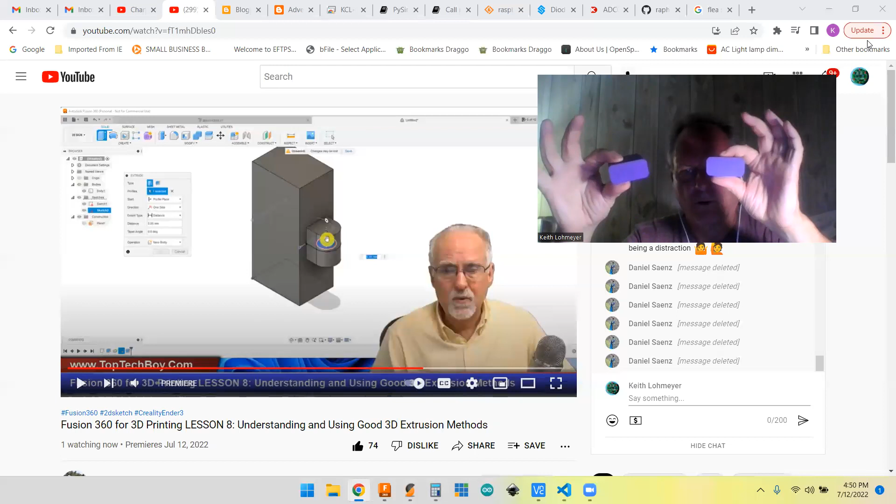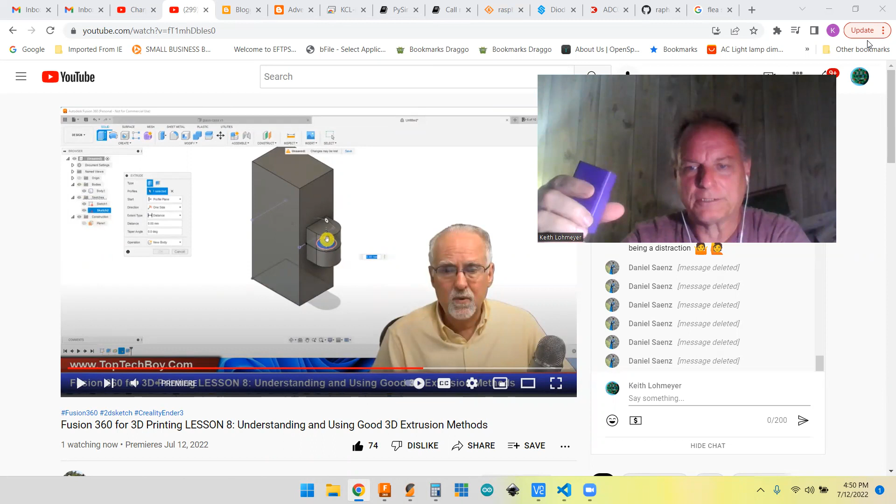So here's the two pieces. Like I say, I work in inches, so I got a 2-inch top and a 3-inch bottom, and it's about 1 inch by 2 inches in that direction, and they slide together. You can see the line where they slide in, and then inside here you can see this line just a little bit in there.

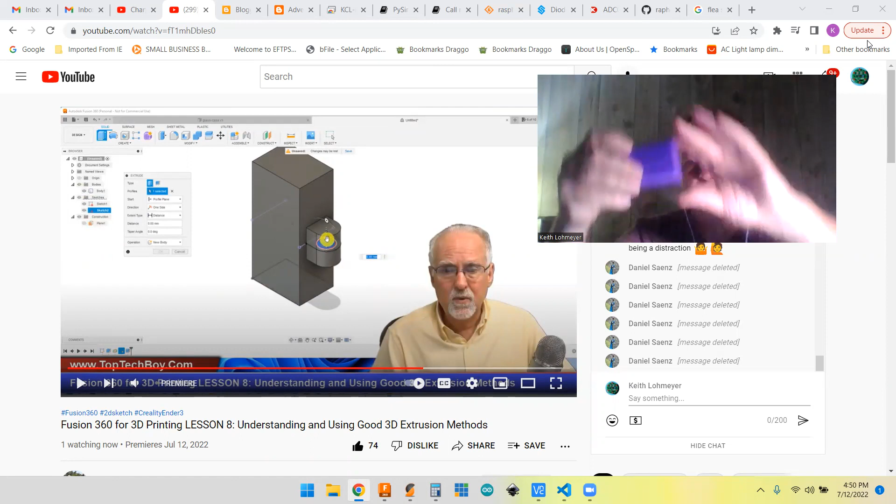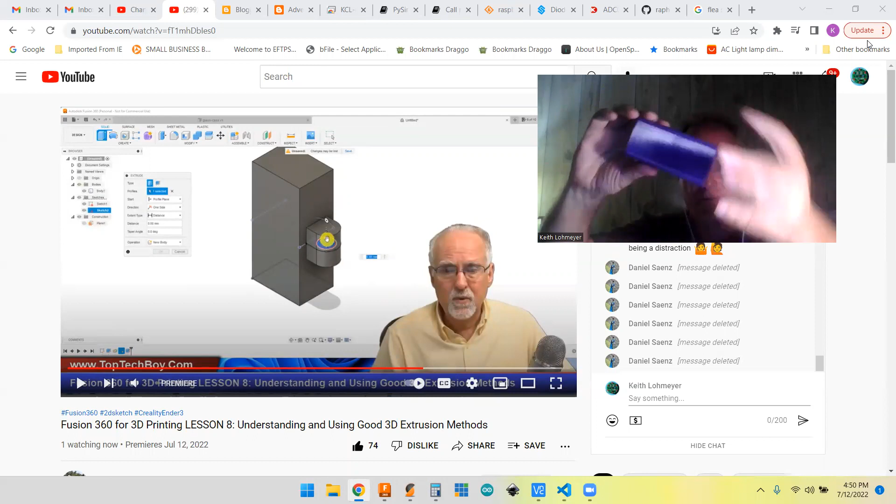So they slide together. I chose to have a 10 thousandths clearance. I knew that would give clearance on my 3D printer, but after I did it, I said well, I probably should have made it a little tighter so that they don't fall apart without help pulling it apart. So like I said, I used a 10 thousandths clearance on that one.

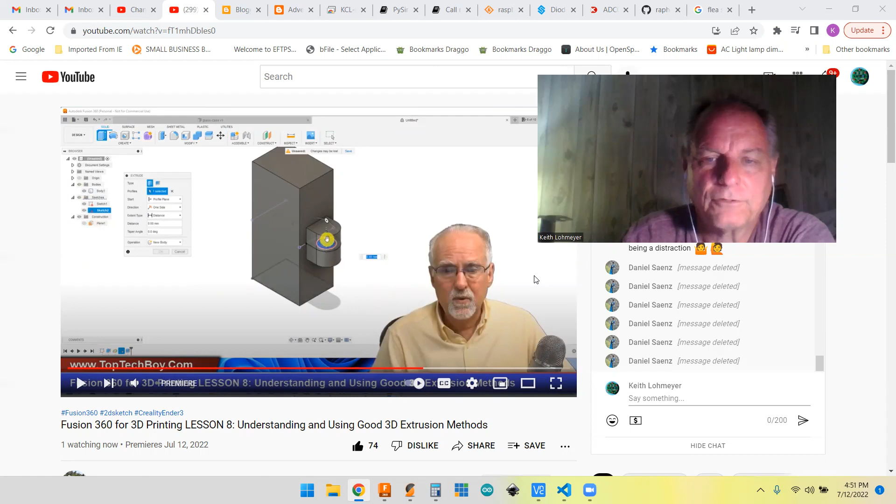I think I'm going to redraw it for you guys and do it with only 8 thousandths clearance, which I think equates to about 0.2 millimeters for those doing metric clearance. So let's go ahead and get to Fusion 360, make myself smaller and move it over.

Choose Fusion 360. If you've watched my past videos, you know that I like to work with components and try to have it assembled in place. So that's what I'm going to do for this project. Probably a little different than how Paul's going to show you, but I like this workflow and it works for me, so hopefully people see a different way of doing things.

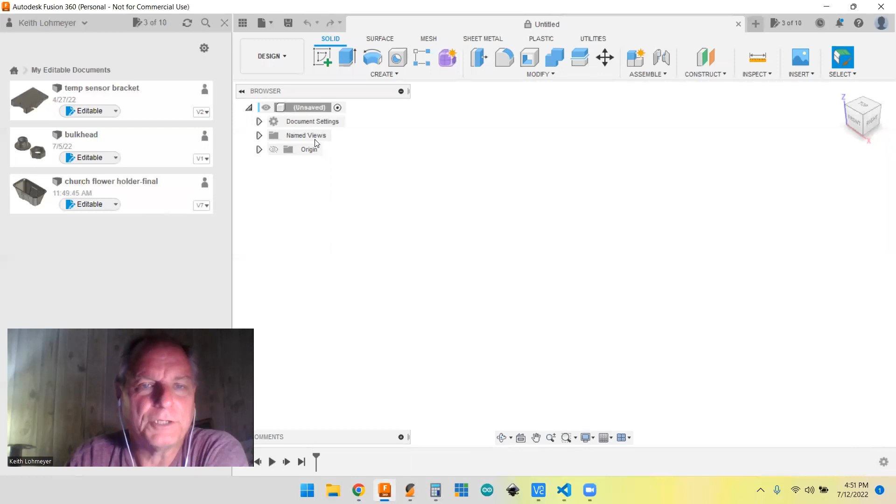We'll start with a sketch. We're on the XY plane. I like a center rectangle, so we're going to do a center rectangle, start in the center and pull it out. Like I said, it's going to be 2 inches by 1 inch. And enter.

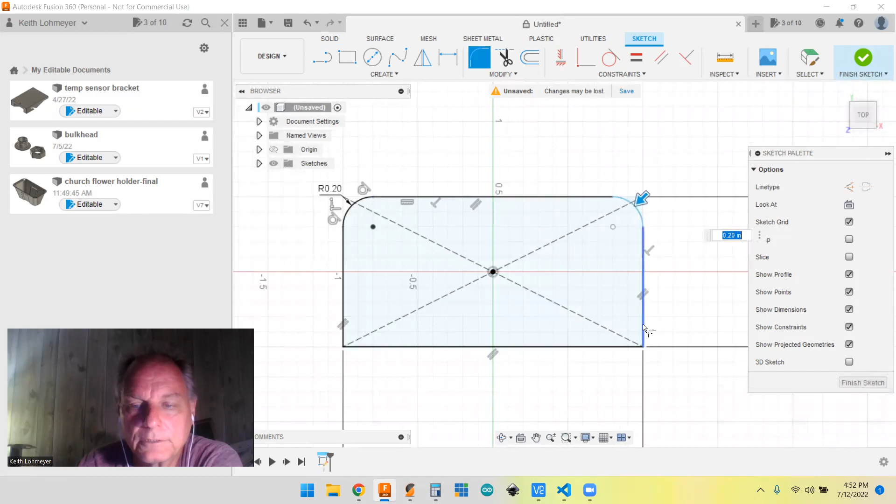All right, so we got that, and then of course we want to put some fillets on it. So we want to fillet this to this, to this, to this, and it's saying a 200 thousandths fillet, and I like a 1/4 inch fillet, so I'm going to go 0.25 for that. So that's good for that.

We got that done. Now, like I said, I like to have it assembled in place. One of the good things about doing that is you can do it with just a single sketch, because we can work both ways on it.

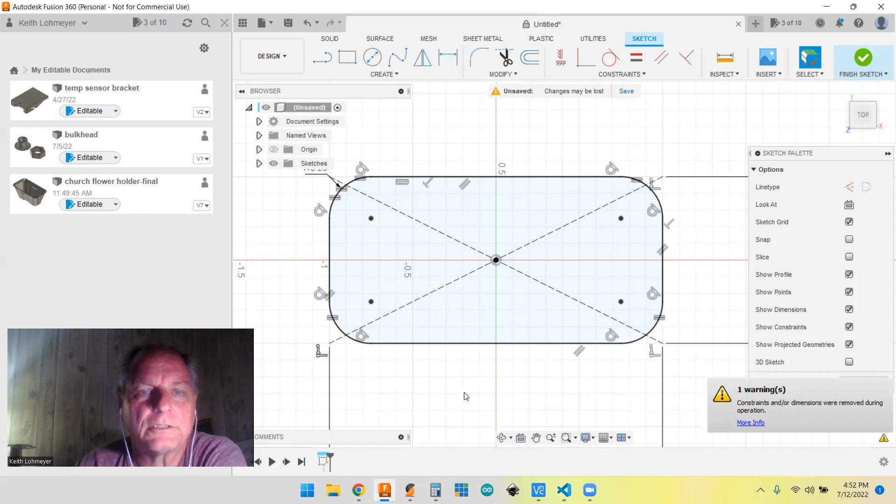So what we want to do is, I want to have the thick shell be 0.1 inch, or 100 thousandths inch. And the thin shell is going to be just shy of 50 thousandths for each side.

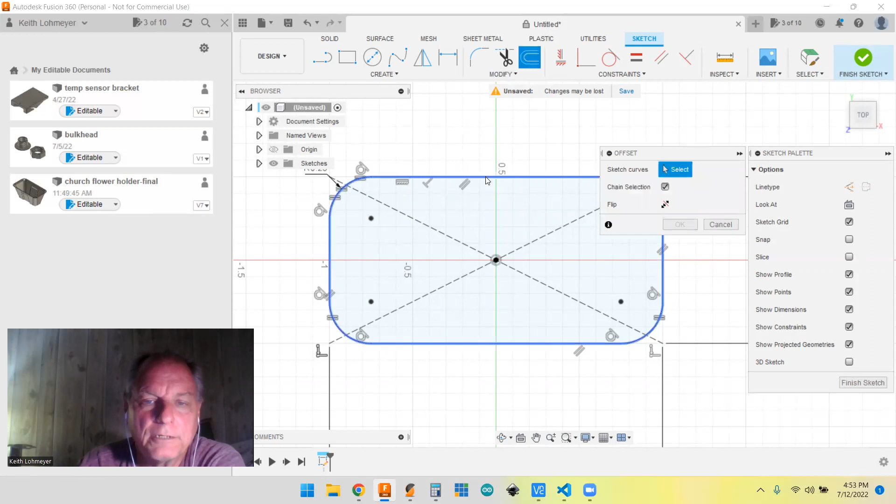So we need to put in an offset plane. So we're going to do offset plane. We want to offset this, and it's actually offsetting to the inside this time. So we want to offset by 0.054 for this one, and then hit OK.

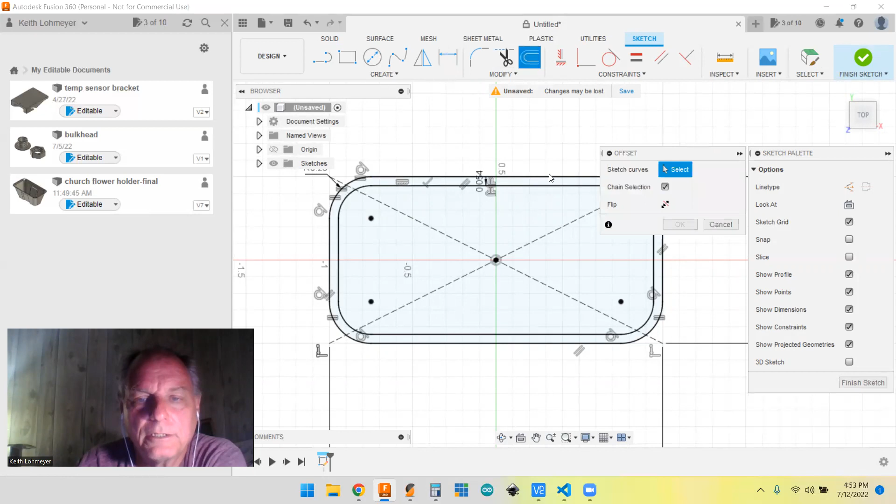And then we want to do another offset plane, and we want this one to be 0.046. So I have a 046 and a 054, so that gives us just 8 thousandths in between the two.

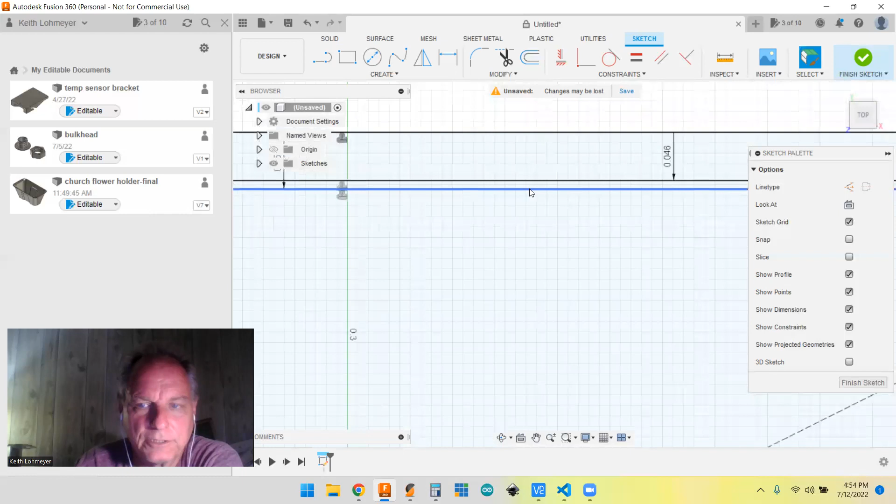That's our actual clearance when we create our parts. Like I said, last time I had 055 and 045, so it's going to be 2 thousandths closer, but we'll see how that works out for us. So anyhow, that's really all we need for a sketch.

So we're going to finish our sketch. I'm going to go ahead and do that. And now we want to create our two components, and I like to do it just in rough first and then finish them up the way we want to do it.

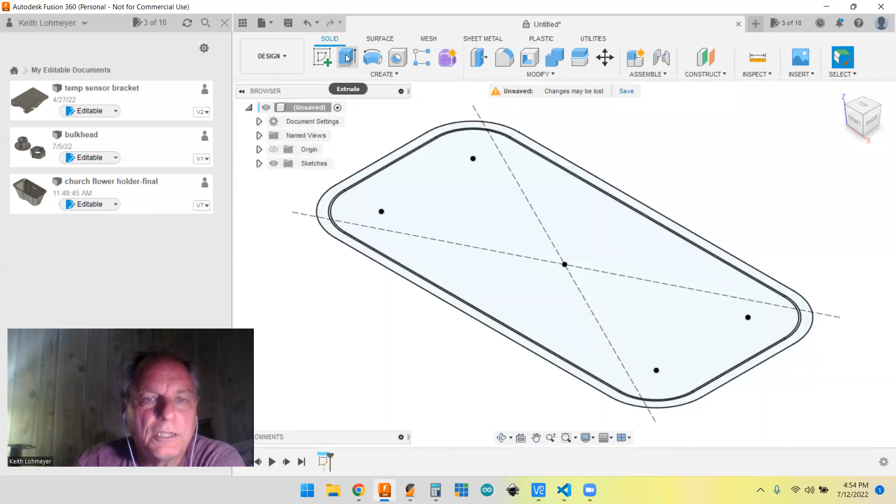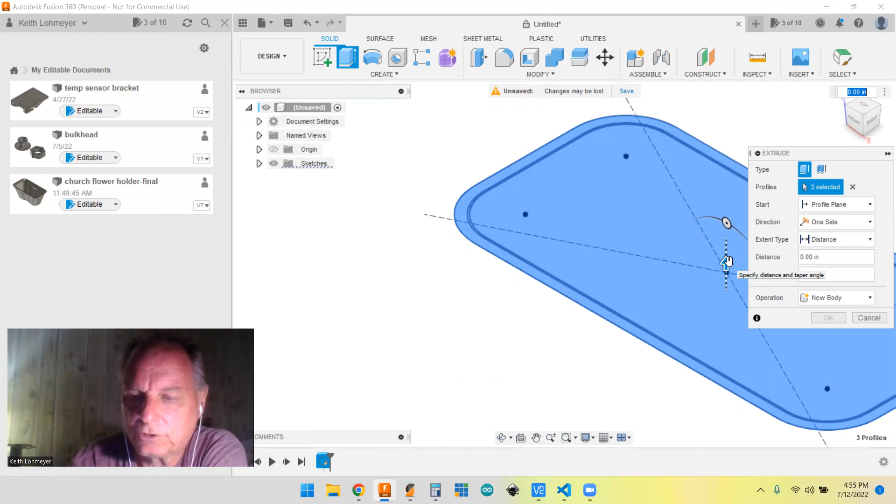So we want to hit E for extrude, and we want to make sure we get them all. So we want to extrude this, this, and this, and we want to extrude it down 3 inches. So that'd be -3. All right.

And then we don't want a new body, we want a new component. So we're going to choose new component, and we're going to say OK. All right, so now we got that.

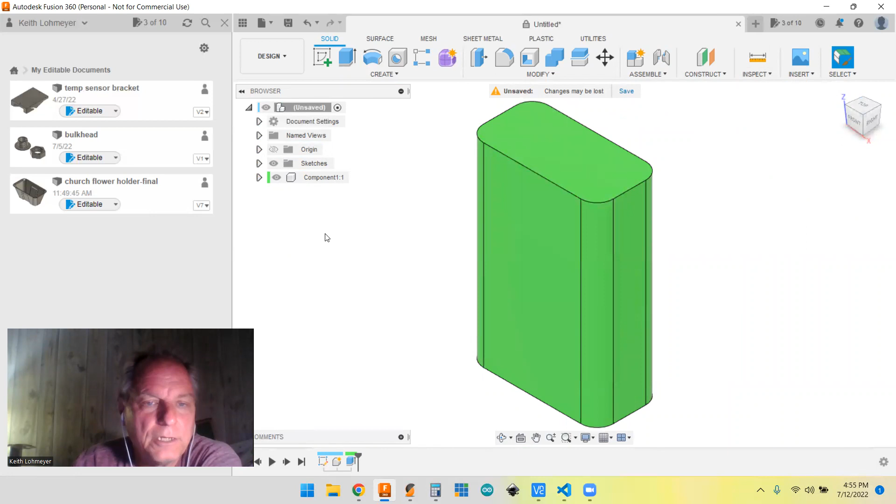So now we got a new component, we might as well name it. This is going to be our bottom, B-O-T-T-O-M. Enter for that. And then we want to extrude again.

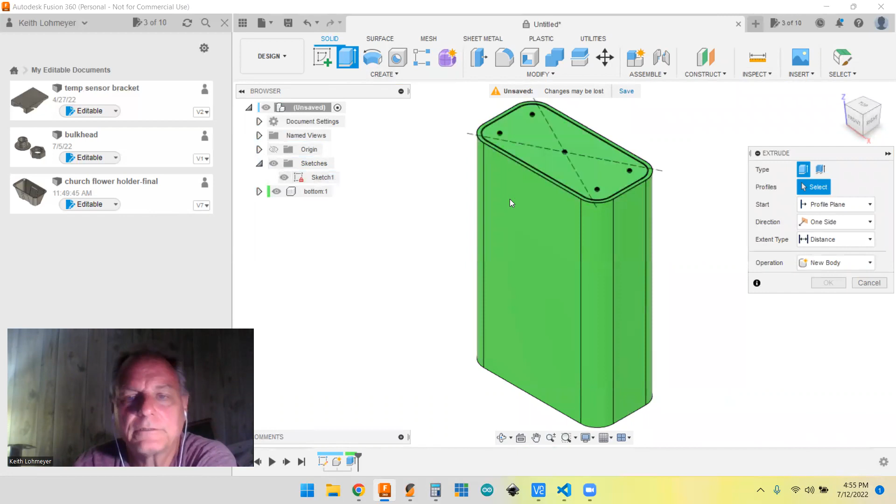We'll have to turn our sketch on because it went off. So we got our sketch back. Now we want to extrude again, and we want to make sure we get all 3 of them. We got to get in close enough to get all 3, so we're going to select this one, and this one.

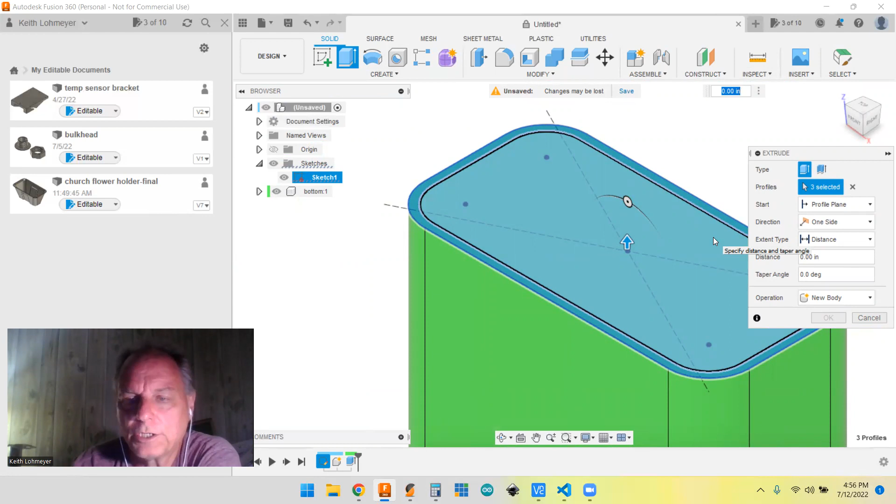This time we want to extrude in the positive direction. Just the way I'm making this, I'm only going to go up 1 inch. So 1. And we don't want to join, we want to make a new component.

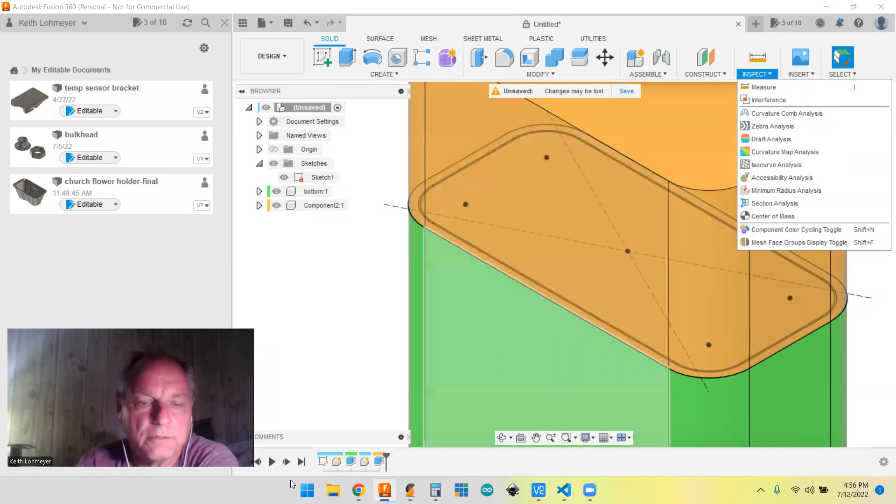Now you notice we got the 2 colors here. That's because we're using our inspect, and we've got our color cycling for components on. So that's what that's about, that's why they're in 2 different colors. If you click that toggle, they'd go back to gray.

So now we got the 2 components. What we do is we want to work with just 1 component at a time. Oh, I didn't rename this one. So slow click twice, and then we want to rename that to the TOP.

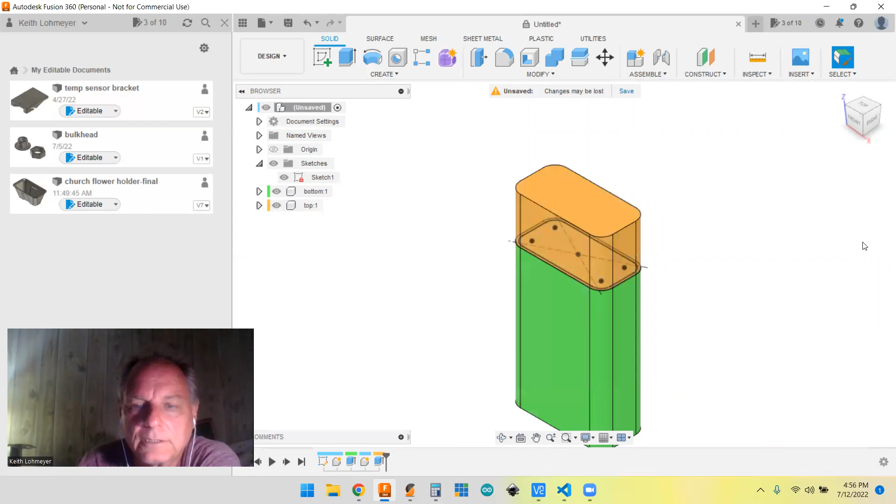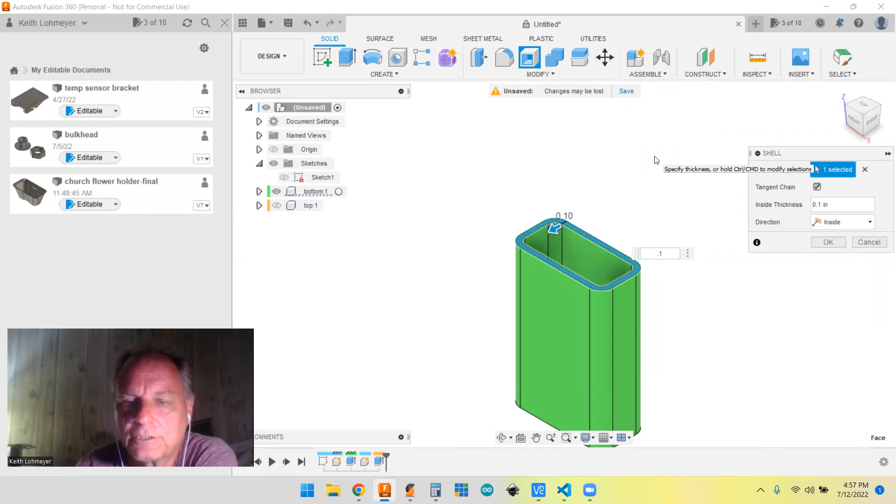Now we got the top, but I want to turn off the top component, and I want to turn off the sketch. Paul hasn't got around to this yet, but it's a really good command. I'm going to shell it out, and I'm going to choose this, and I want 0.1 shell, and that just puts the shell out there for us.

And while we're at it, we might as well turn the other one on and turn this one off, flip it over, and do the same thing on this. Make sure you get the right side again. We want to shell it, we want to shell this at 0.1. And there we go, we got that done.

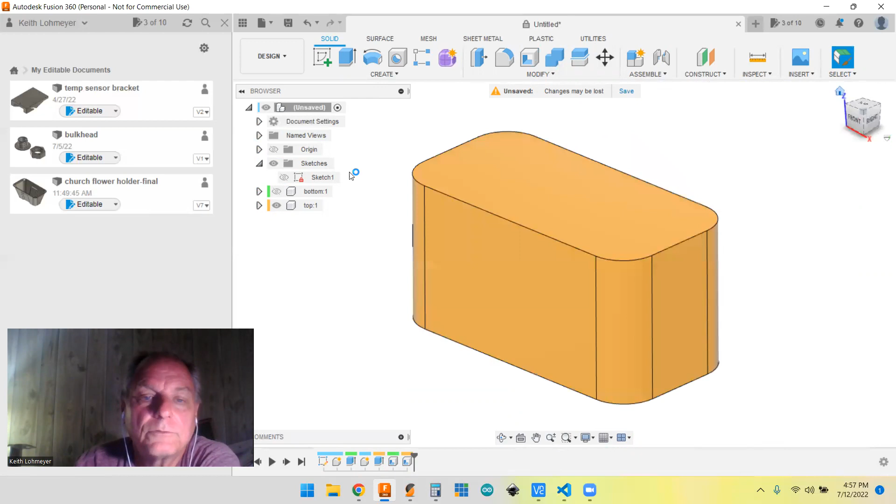And go home, and up. Turn both of them on and go home. So now we got them, but they don't have their sliding parts in yet. So we'll go ahead, like I said, we're going to turn the top off and work on the bottom first.

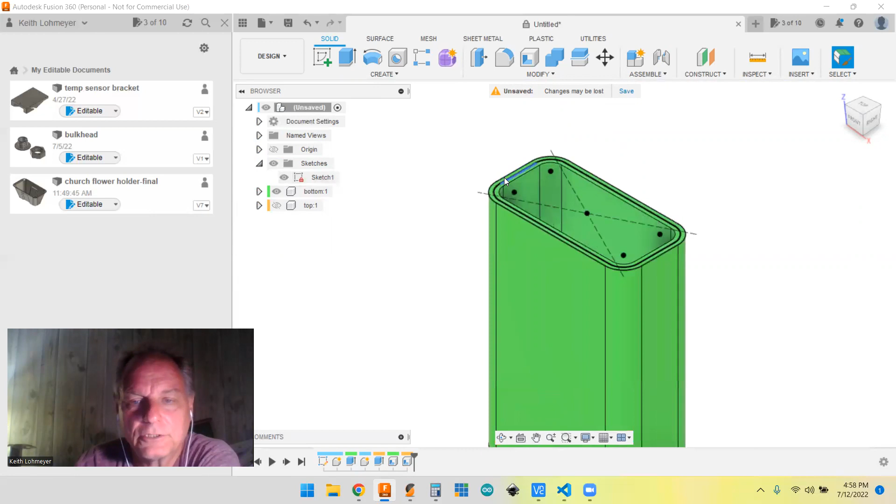We want to turn our sketch back on, our only sketch. So what we want to do is we want to actually extrude this part down. We're going to have the cut on the bottom part. As you can see in this one, the cut's on the bottom. So we want to cut. So what do we want to cut?

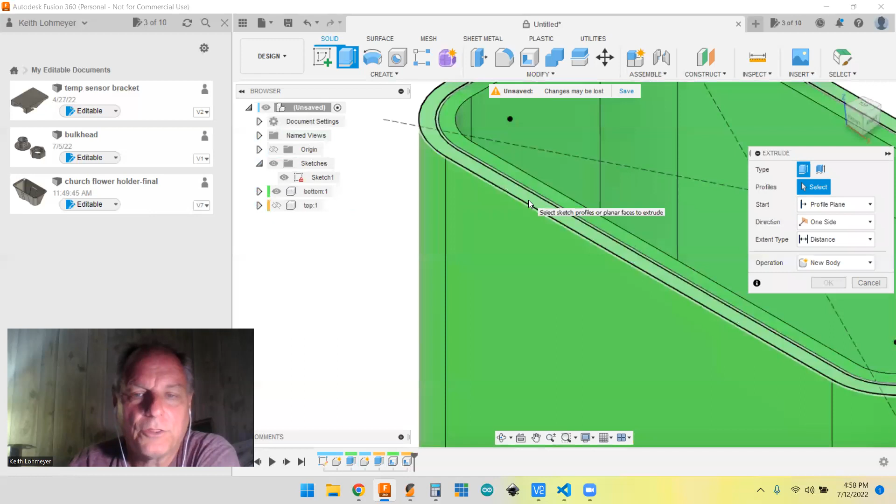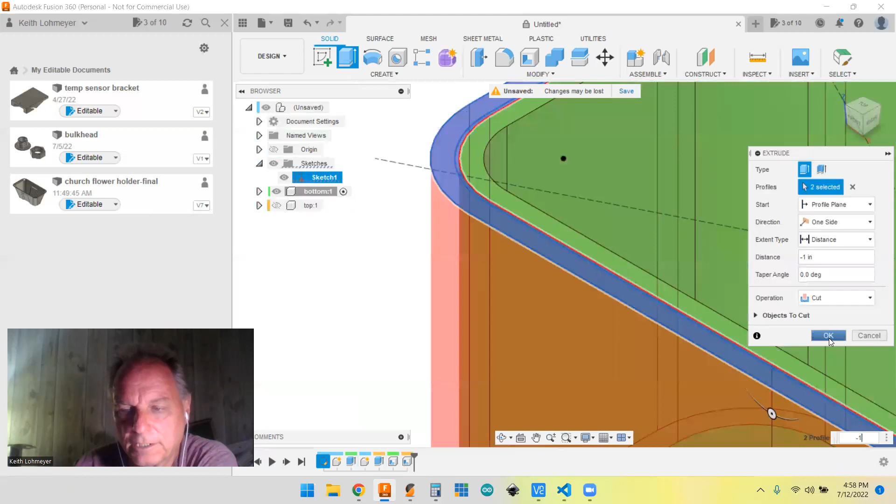We want E for extrude, and we want to cut the outside thickness, plus we want to go ahead and cut our clearance fit as well. We got both of those selected, and we want to go down, so -1 inch. And we do want to cut here because this is all working on the 1 component. You can see that the dot went to that component, so it knows it's doing it on that component. And we can just say OK.

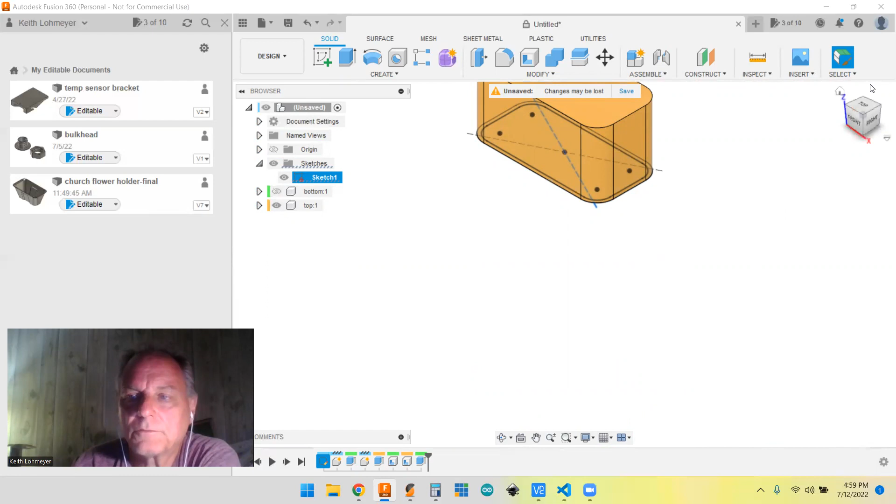And you can see we got that done. Now we can turn this off and turn this one back on. And this time we want to turn this around a little bit.

We want to pull that down, but we only want to pull the outside part down, so we don't want to bring out the clearance. We only want to bring out the outside. So we want E for extrude, and we just want to extrude this down and this.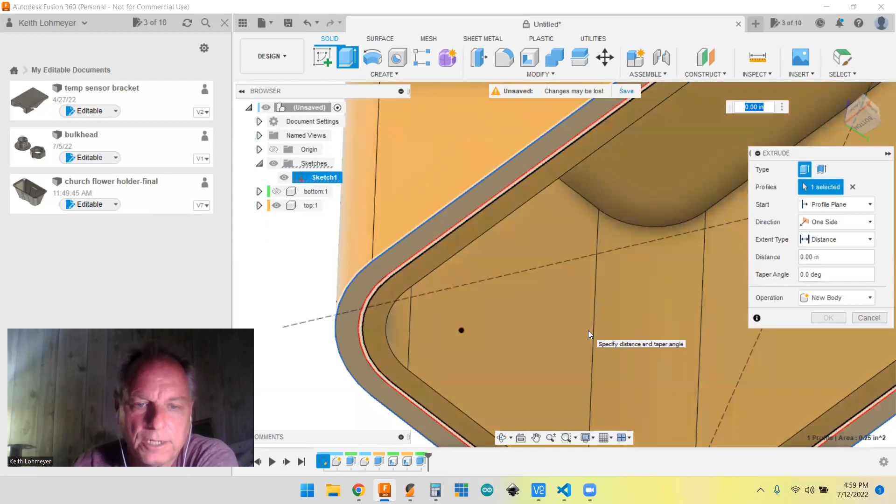And then we want to come 1 inch. Whoops, and -1 inch I guess. So -1. There we go. And it's asking about join, and that's what we want this time because we want to join it.

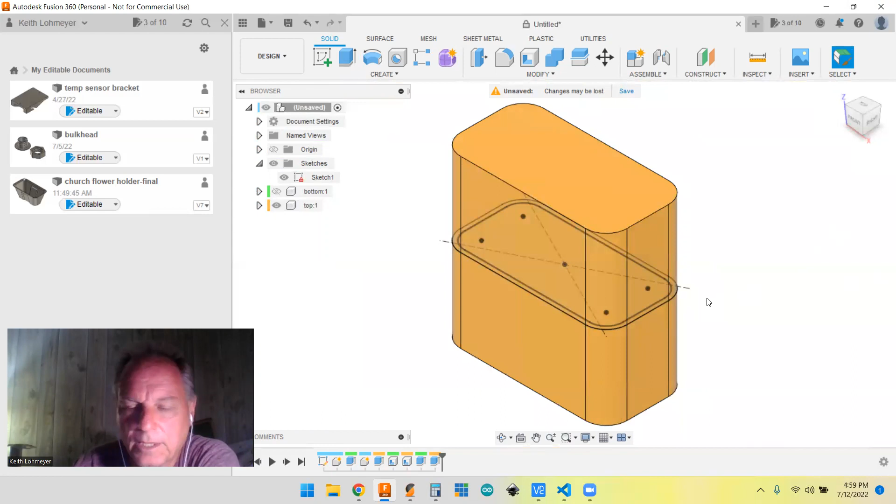You can see the ridge inside of here now. So let's go ahead and turn the sketch off. I think we're finished with it. So we got our ridge inside of there.

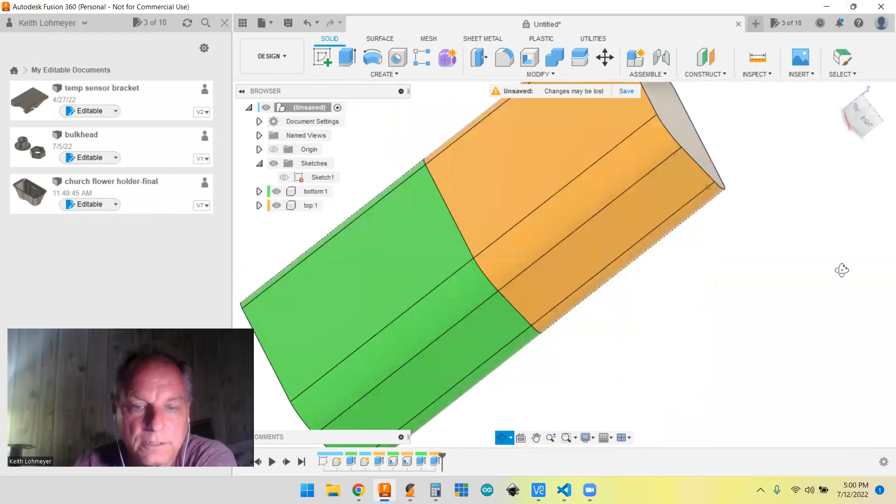And we got this part. So we turn them both on. You got to put together.

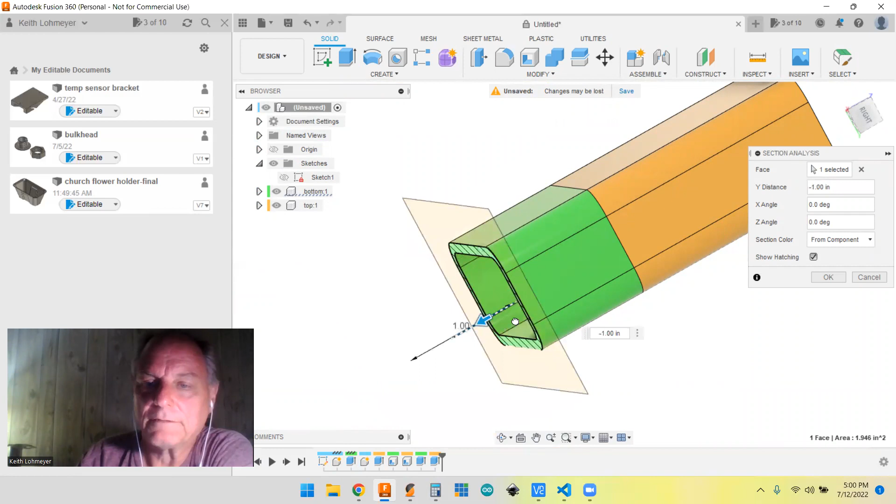Another cool thing we haven't got to in Paul's classes yet is with our inspect tool, we can do what they call section analysis, where you can actually cut through the part and see what you've got. So I want to cut on this plane, and we want to go into it, up to where they're actually two pieces.

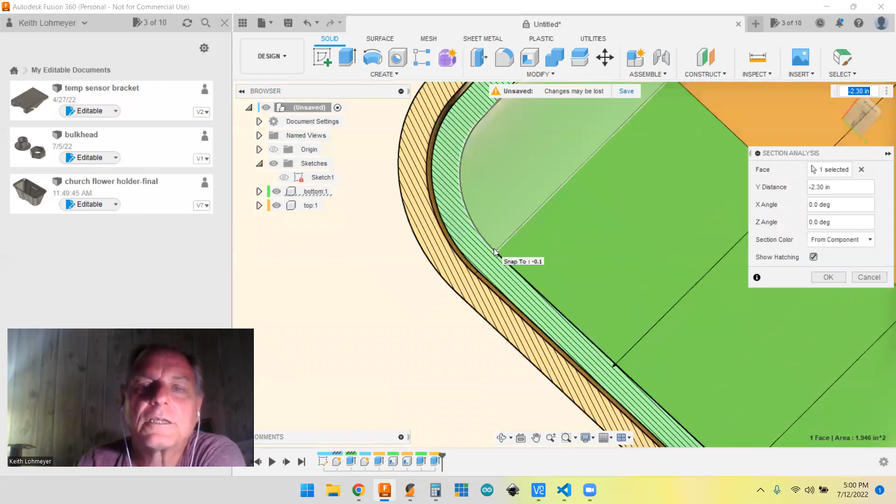So this is where you have parts of the inner and the outer, and you can see we have our clearance. It's an even clearance all the way around with that offset thing. Nice and clearance, and that's all we had to do to it, actually. So we're done with that.

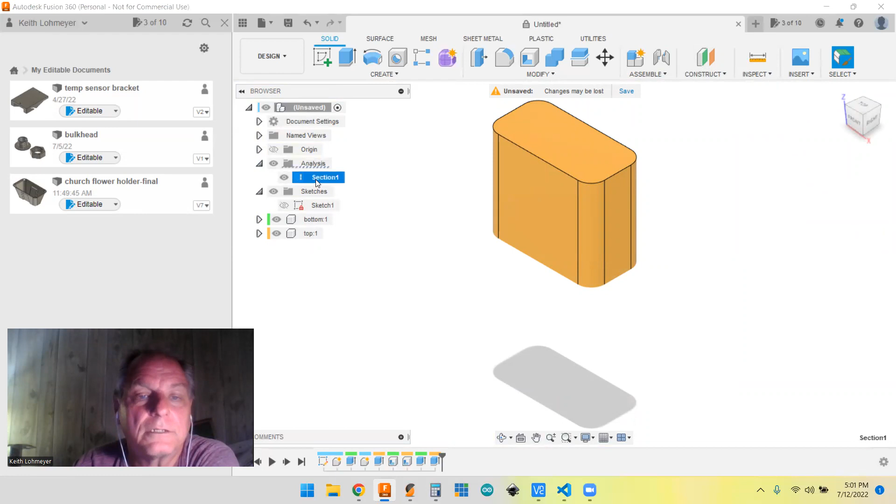So we'll just say okay and go back to home. Oh, probably need to get rid of that. Analysis, there we go, and we want to just delete that. There we go, back in business.

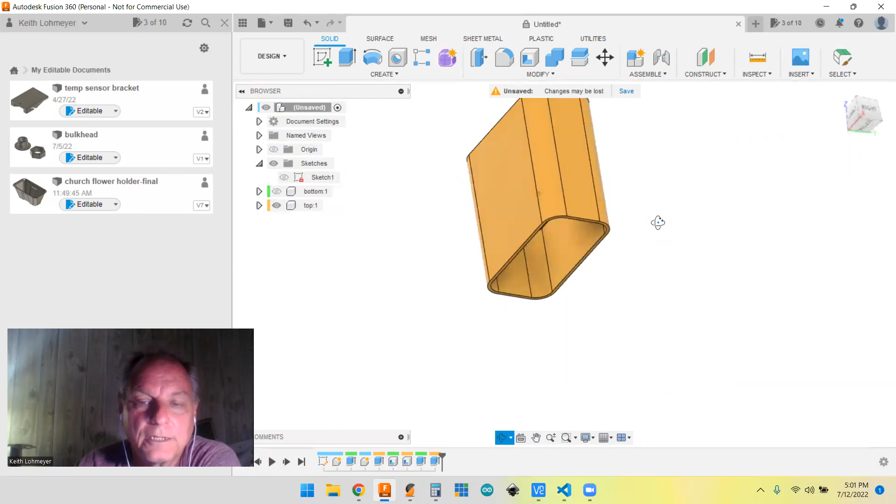Yeah, the section analysis showed up in our tree browser over here. So now you can just turn one off and turn both off and turn the other one on. Like I say, you can see up in there. All right, so that should be all we have to do.

I know Paul doesn't like going below the line, the planes on this, but it really doesn't matter, because if you're going to 3D print it, you can always get it flat when you take it to the slicer, and that's what we're going to do now.

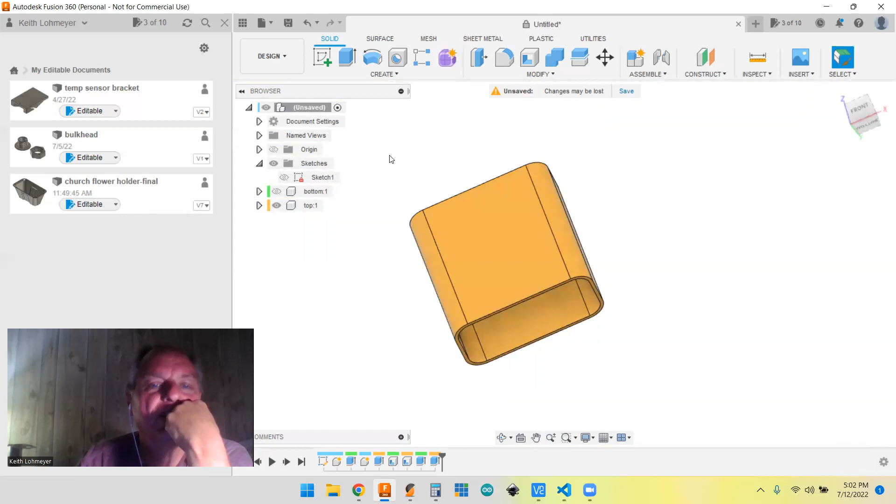I probably actually still have the other one in the slicer, so you'll see it when we go in there, but I'm going to go ahead and do it again just to make sure. So what you do is you only choose one at a time, and you say that I want to 3D print, and select that.

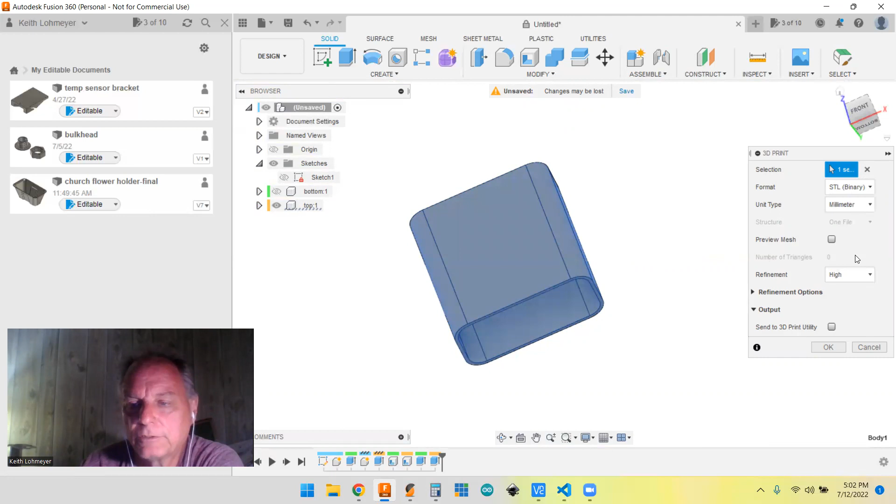And like I say, make sure it's in millimeters, even though we're sketching and designing in inches, you want to export it as millimeters for the 3D printer. And we just say okay, and we want to do it, and I'm going to call it... I think you can see I already got it done.

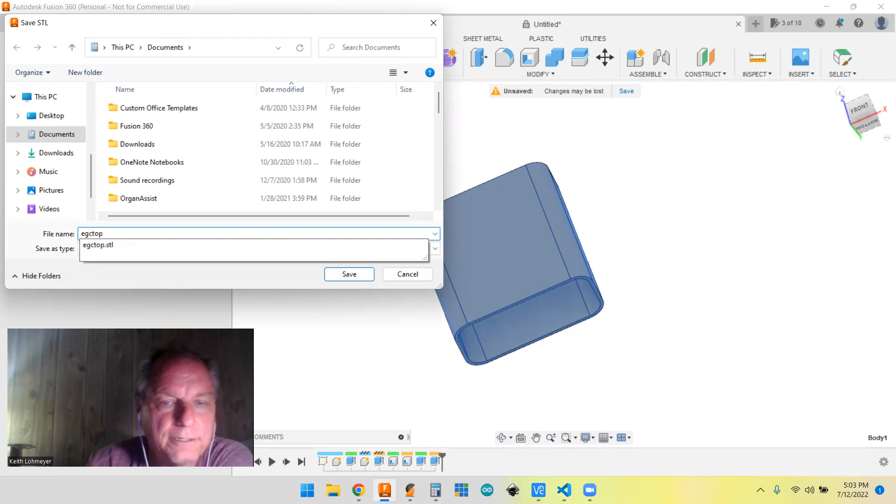Eyeglass case, and this is the top, so TOP. And it's going to ask me, yes, I want to replace it, because I did it with the 10,000ths clearance, and now I'm doing it with the 8,000ths clearance.

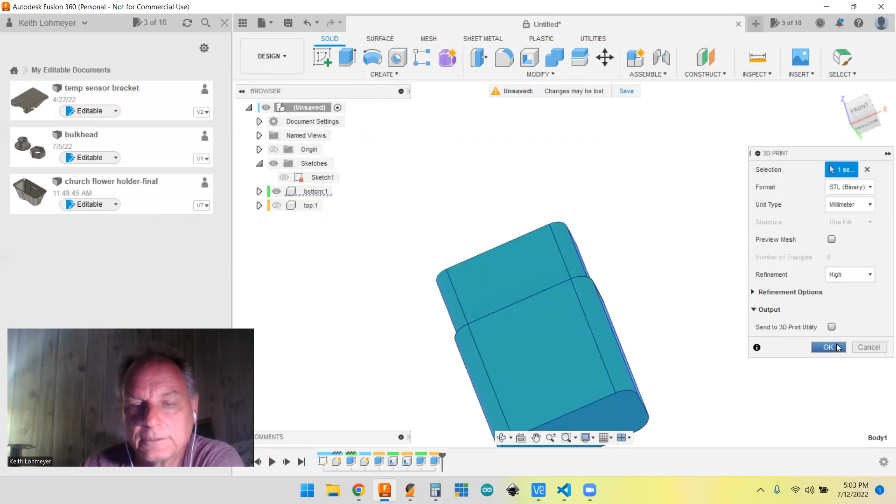So now you turn off the top and turn on the bottom, and we do the same thing. 3D print, and we select it, one selected, and we hit OK. And we want to call it eyeglass case bottom. And just choose that to replace it, and say yes, I want to replace it. All righty, so that's all we have to do there.

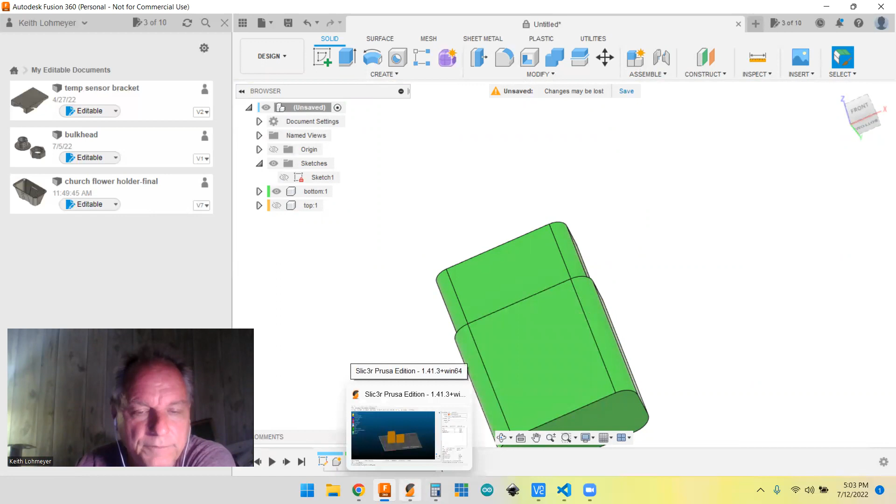And then, like I say, you guys, I think a lot of you are using Cura, but there's the one that we have. So I am going to get myself out of the way now, and go back here, and then we can just delete these.

All right, and now we're going to go ahead and bring them in. So we want to file, open, and we want to open the top. And now this is where it's open, but if you notice, it's upside down, which is, don't want to print that way.

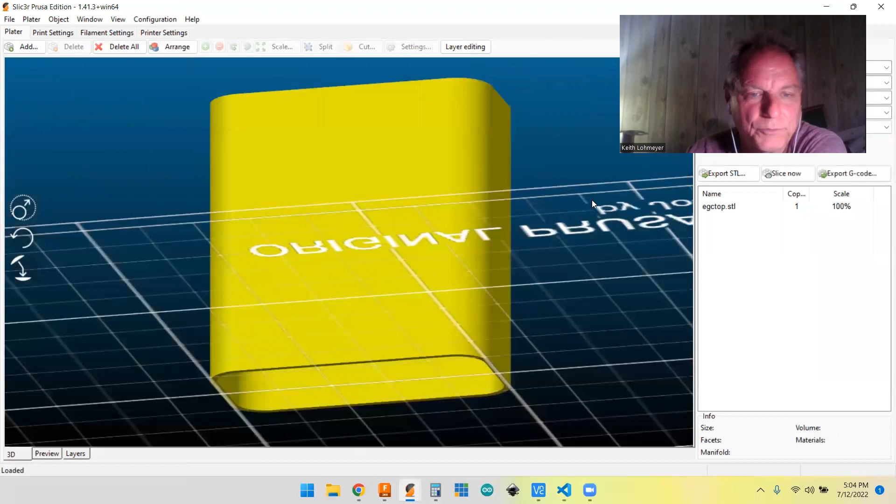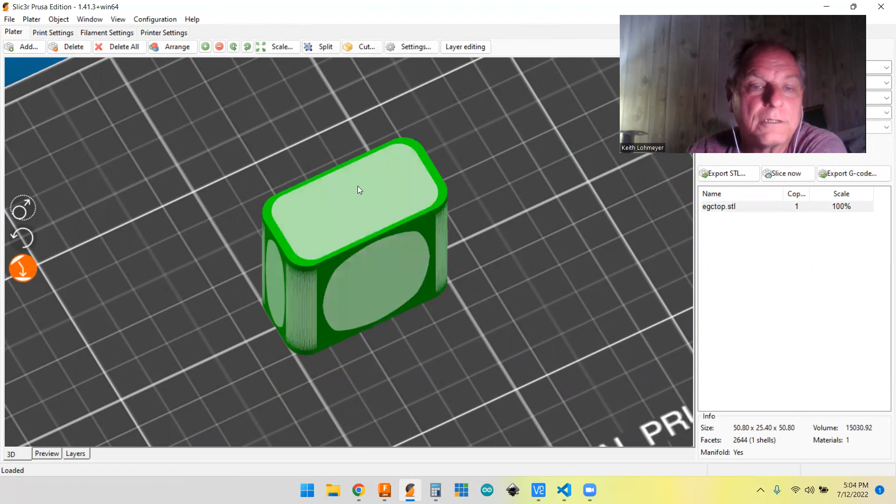And not sure how you do it. There's a way to flip it in Cura as well, but if you do this here, you select it and you just tell it that you want this to be on the bottom, and now you're done. And now it's right side up.

So we're good. Then we're going to import the other one. And it's going to put it right over top of the other one, but we can move it out of the way. Just move it out of the way.

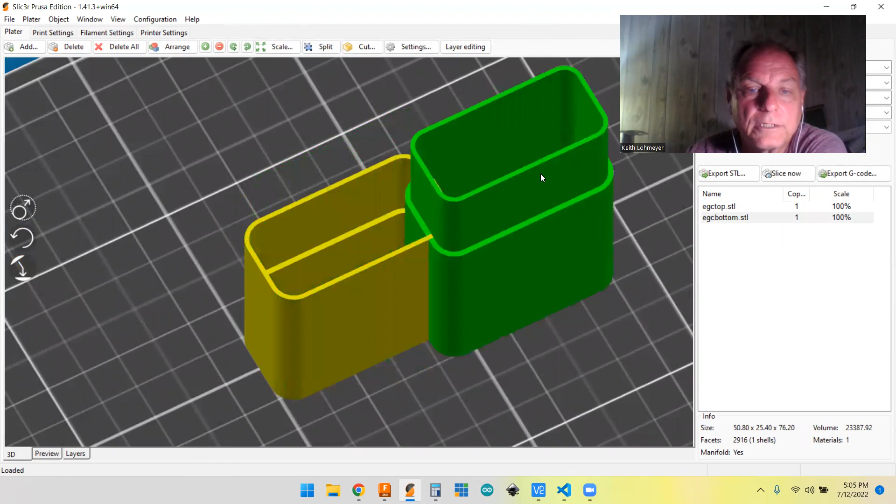And this one's right side up, so we don't have to do anything with it. You can see. That's all there is to it.

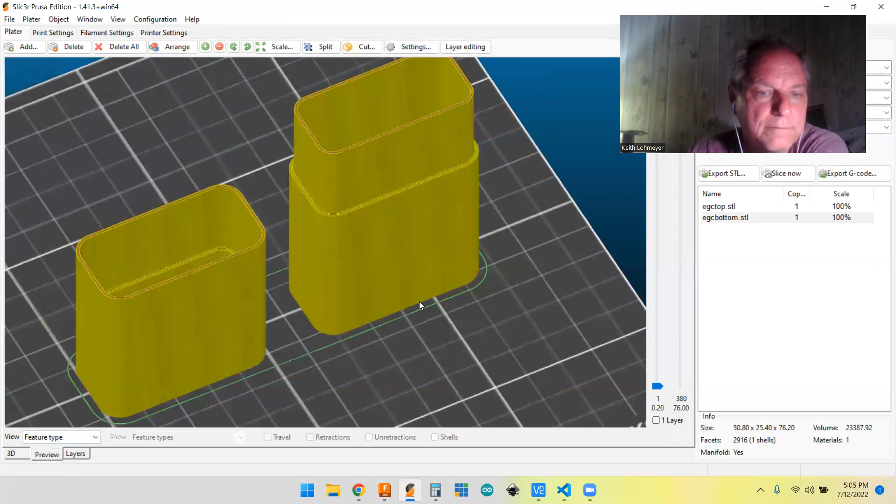I'm going to say we want to slice now, and let's slice, so we want to look at it. I'm in my way again. Let me move out of the way, and then you can bring this down. You can see that the walls on this are mostly perimeters.

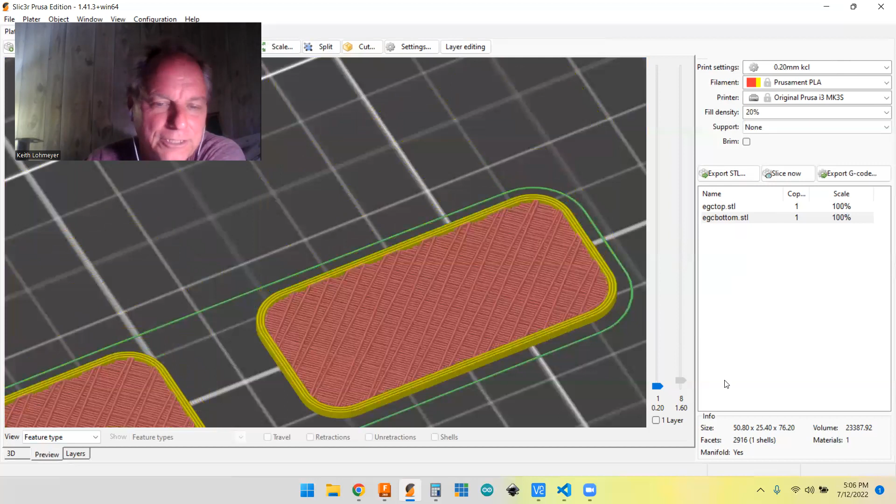I use 3 perimeters on almost all my prints. 3 perimeters, even with 100 thousandths width, you're getting all perimeters. So that helps out, you don't have all that when you're printing out those little internal spaces. So I like to do it that way. So anyhow, that's all there is to it.

And like I said, hopefully you end up with something like this when you're done. And if I reprint it, it should be a little tighter than this. There's nothing wrong with this case, but it just doesn't hold together.